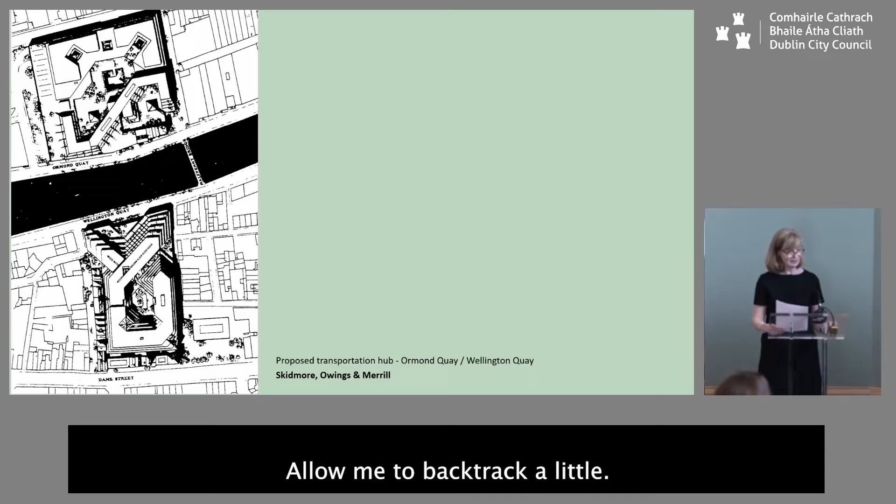In the late 1980s, Dublin Corporation had issued road widening proposals for the quays that would have involved the destruction or partial removal of several riverfront structures. These intended measures, coupled with the proposal for a quayside transport hub, triggered concern for the historic area between Dame Street and the River Liffey.

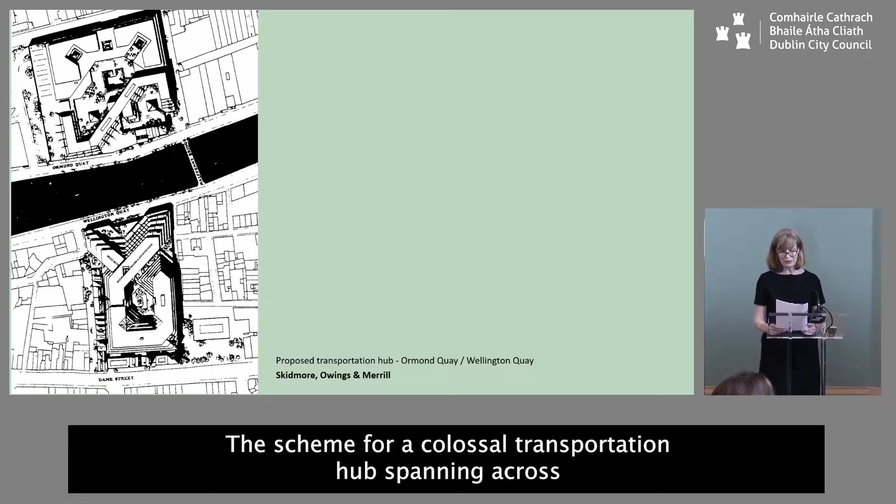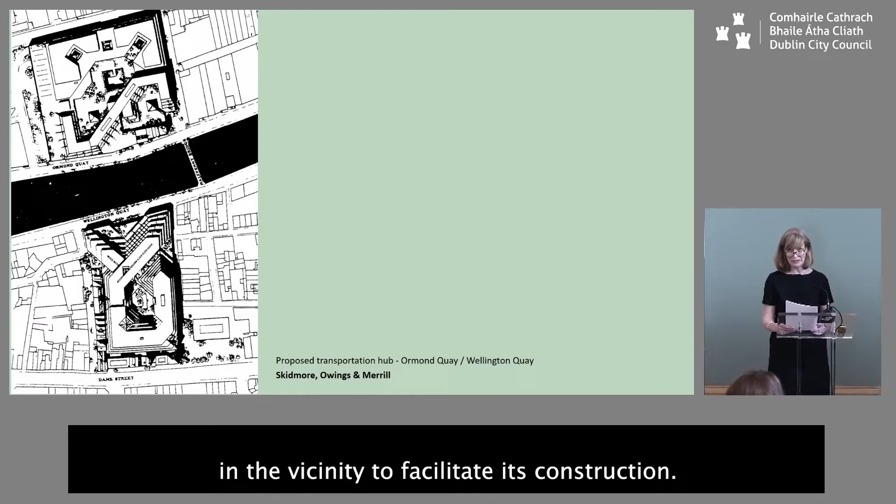The scheme for a colossal transportation hub spanning across the river was designed by American firm Skidmore, Owings and Merrill, shown here. CIE had acquired numerous properties in the vicinity to facilitate its construction. Short leases were issued and cheap rents were available in the area, as many properties were earmarked for demolition in preparation for this development.

In an article in the Architectural Review at the time, Catherine Slessor describes the temporary impact: this nurtured an eclectic, vibrant mixture of small-scale users, cafes, art galleries, shops, clothing factories, and recording studios, attracted by the cheap rents and bound together by a spirit of optimistic bohemianism.

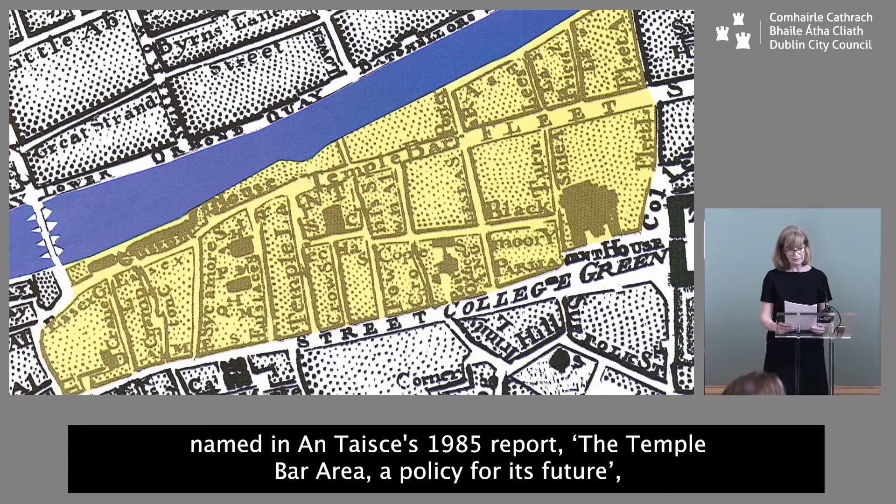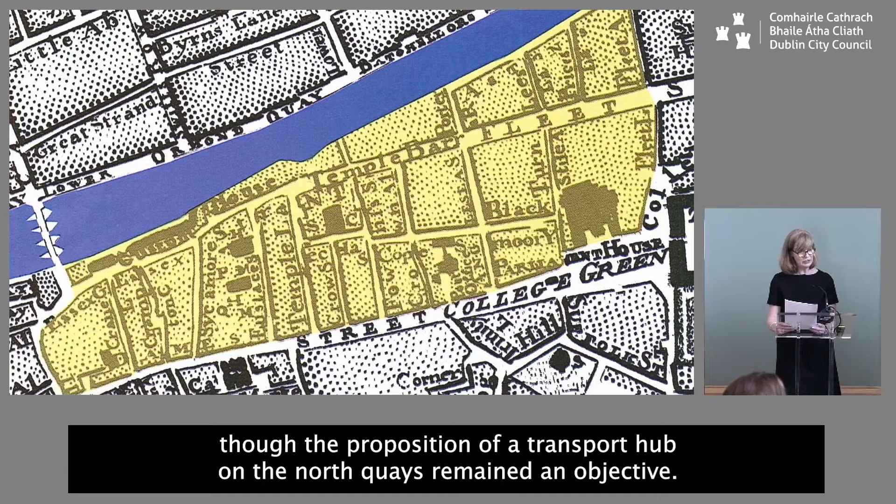Needless to say, this heavy-handed proposal prompted widespread protest and sparked debate on the treatment of the city. The plight of Temple Bar, first named in An Taisce's 1985 report, The Temple Bar Area: A Policy for Its Future, attracted political consideration, having gained press attention. The plans for the bus depot on the south side of the quays were eventually shelved in 1987, though the proposition of a transport hub on the North Quays remained an objective.

In a landmark move, a state agency, Temple Bar Properties, was established following the Temple Bar Renewal and Development Act in 1991, to manage the reinvention of this area and oversee the creation of a new cultural quarter for the city.

Consequently, a competition to develop an architectural framework plan for Temple Bar was announced. 12 practices were invited to enter, and Group 91 submitted the winning entry.

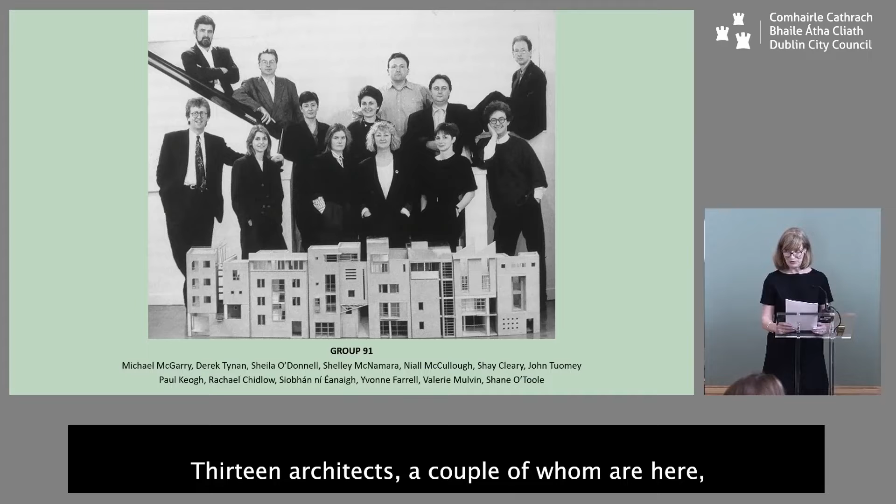13 architects, a couple of whom are here, from 8 small architectural practices made up the Group 91 consortium. The group had formed in 1991 to celebrate Dublin's designation as the European City of Culture, but many of them had collaborated on urban proposals and exhibitions in the 1980s, which could now be tested.

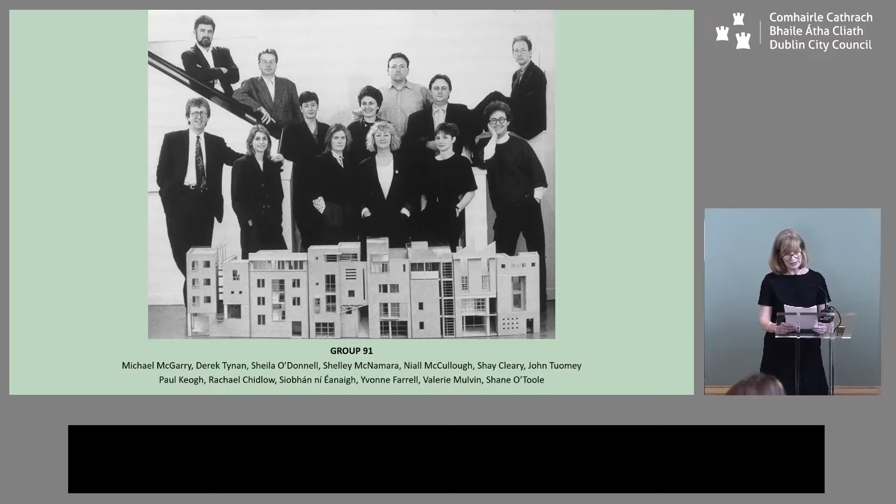In tracing formative influences, it's interesting to note that many of the Group 91 architects had studied together in UCD, some under architect Ivor Smith, who was Professor of Architecture in UCD in the 1970s. Smith and his so-called Flying Circus cohort, which included Ed Jones, Kenneth Frampton, John Miller, Chris Cross and Neave Brown, among others, would fly in from London to teach each week.

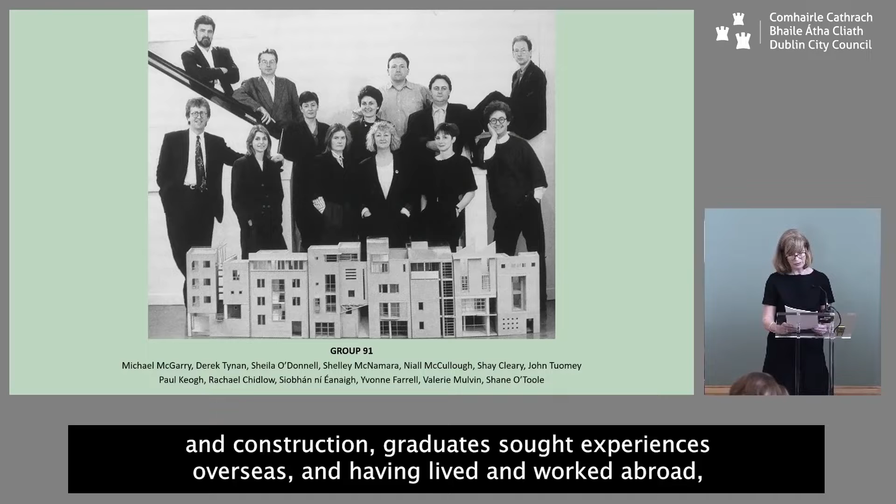The 1980s became a time of experimentation and reflection for many architectural practices in Dublin. With a lack of opportunity in building and construction, graduates sought experiences overseas, and having lived and worked abroad, a generation of young architects brought with them new ideas and attitudes to urban regeneration on their return home.

In a 1984 article, Key Questions, in the Architect's Journal, Gerry Cahill, who we've just been hearing about, describes an exhibition highlighting the work of new emerging practitioners at the time, such as the City Architecture Studio, a collaborative group of young architects, many of whom would go on to form Group 91. The projects exhibited explored the challenges and potential of building in the city and sought to demonstrate how traditional building considerations and urban patterns can be incorporated into new designs.

In 1985, many of the architects involved had participated in the UCD Dublin City Quays project, which was led by Gerry Cahill, Loughlin Kealy and Cathal O'Neill. In many senses, this celebration of what might be possible was enshrined in this endeavour.

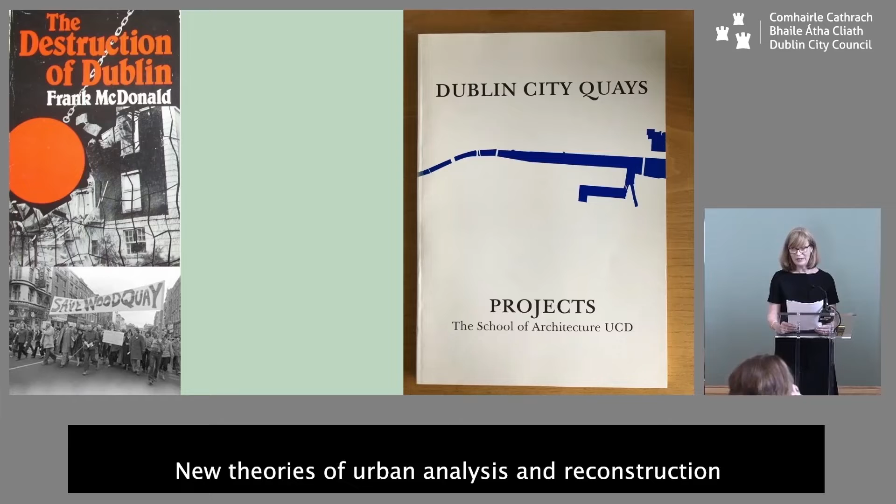The writings of international architects and theorists such as Aldo Rossi, Leon Krier, Gunnar Asplund and Kenneth Frampton proved influential at this time. New theories of urban analysis and reconstruction were explored and disseminated through teaching and practice. Part of this new thinking involved a rejection of modernist ideals and a move towards a more contextual approach to urban development. Further afield, Colin Rowe's 1978 Collage City presented a critical re-examination of urban planning theory, redefining the role of the architect in the context of contemporary urban design.

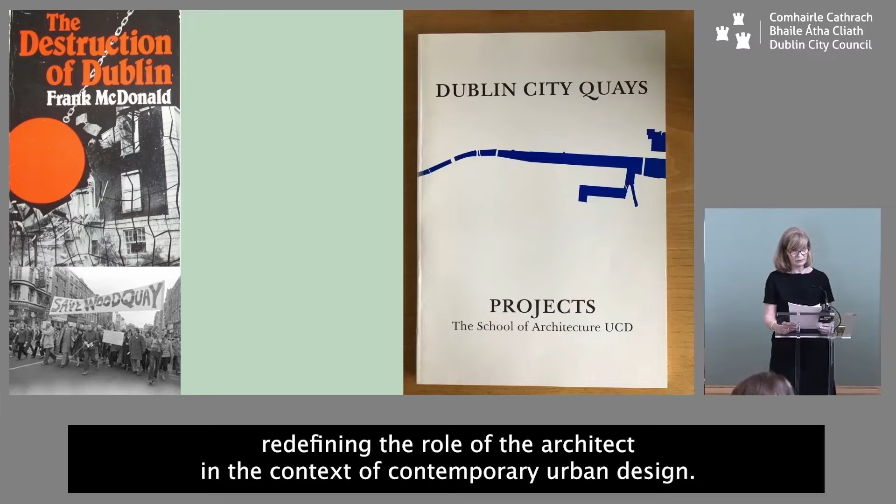Rowe was preoccupied with urban form and was critical of the modernist approach to urban development. Like Rossi, he presented a study of the traditional city and explored the layered evolution of contemporary cities against the backdrop of classical theory. In practical terms, this contextualism is reflected in the work of Group 91, who sought to introduce contemporary elements into the historic setting of Temple Bar.

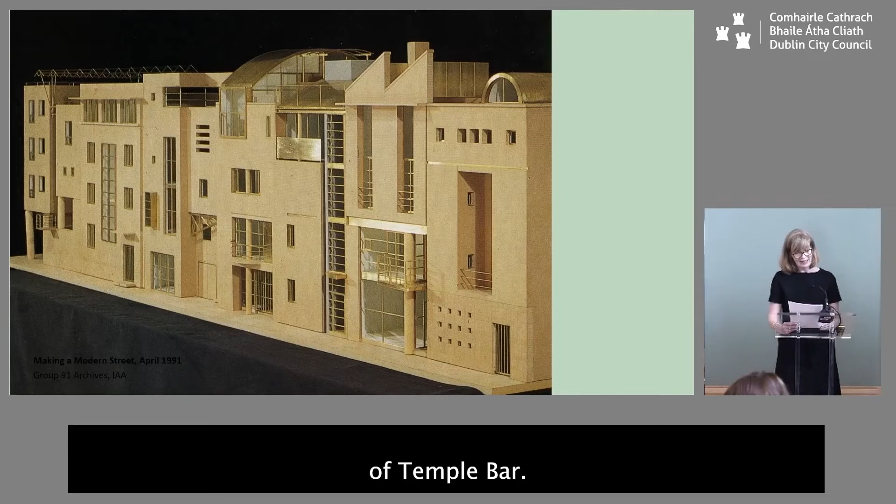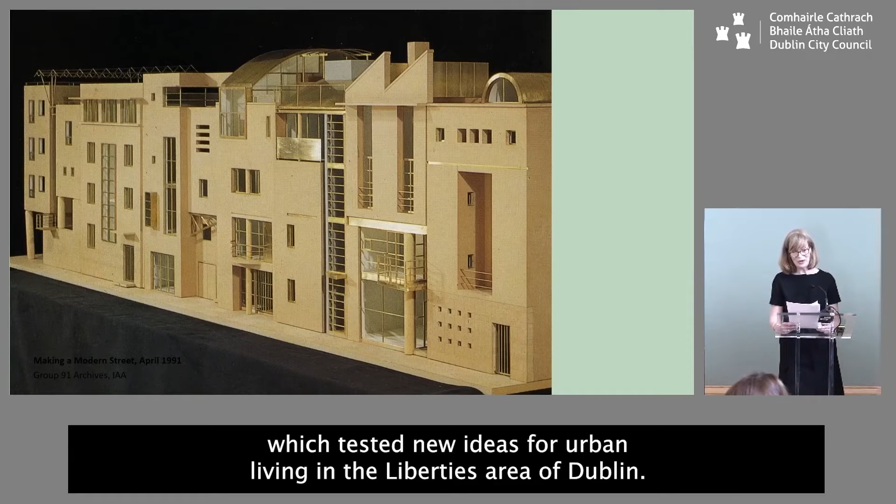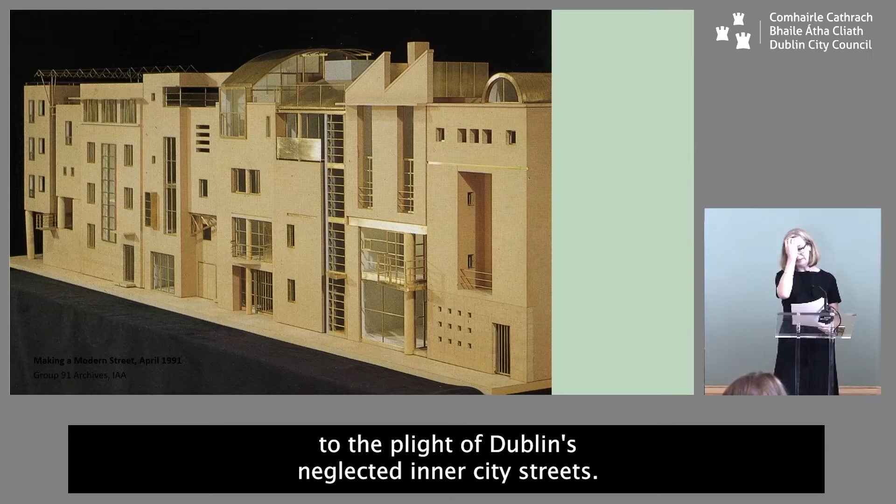In the period leading up to the Temple Bar competition in April 1991, Group 91 staged Making a Modern Street, an architectural exhibition which tested new ideas for urban living in the Liberties area of Dublin. The proposals were intended to be provocative, to ignite debate and bring focus to the plight of Dublin's neglected inner city streets. They won the Temple Bar competition in the autumn of that same year.

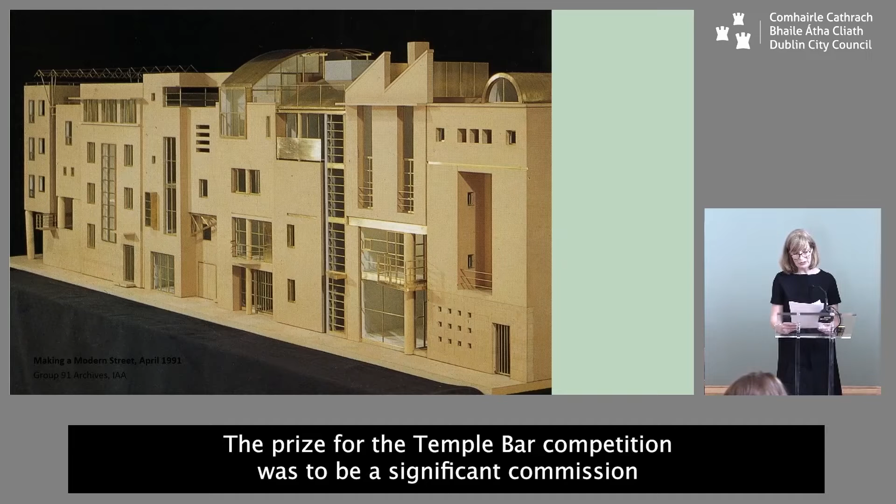Derek Tynan recounts how they were the new kids on the block, hungry for work. The prize for the Temple Bar competition was to be a significant commission involving the design of a series of public spaces.

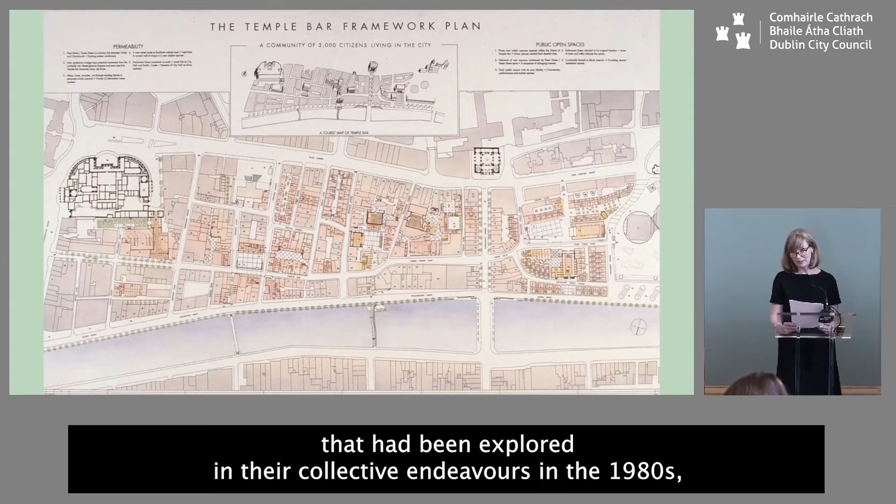The Group 91 framework plan encapsulated many of the ideologies and theories that had been explored in their collective endeavours in the 1980s, and in this regard, they were poised to tackle this challenging brief.

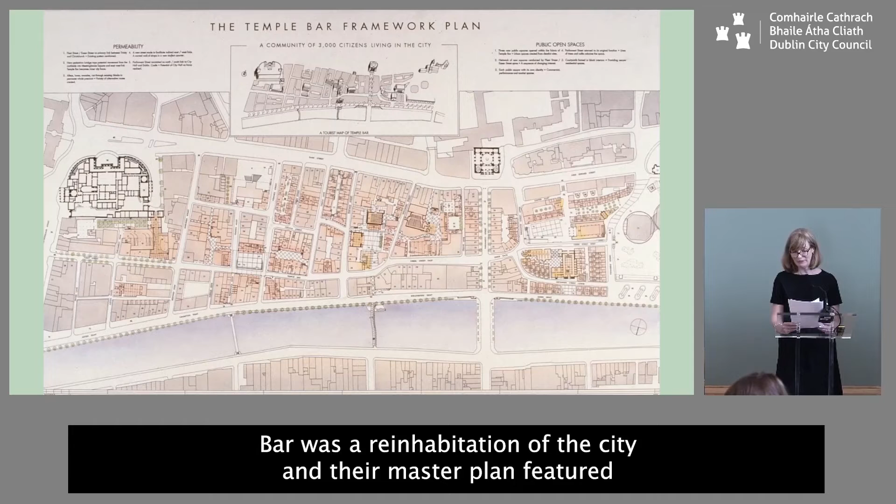Central to the Group 91 vision for Temple Bar was a re-inhabitation of the city, and their master plan featured the tagline, 'A community of 3,000 citizens living in the city.'

Their design strategy prioritised an overview of the historic quarter and a regeneration of existing structures and streets rather than a tabula rasa approach to development. Pedestrian routes and public spaces were designed to connect a series of civic spaces, or cultural clusters, dotted through Temple Bar, opening up spaces within urban blocks that were largely decrepit or derelict.

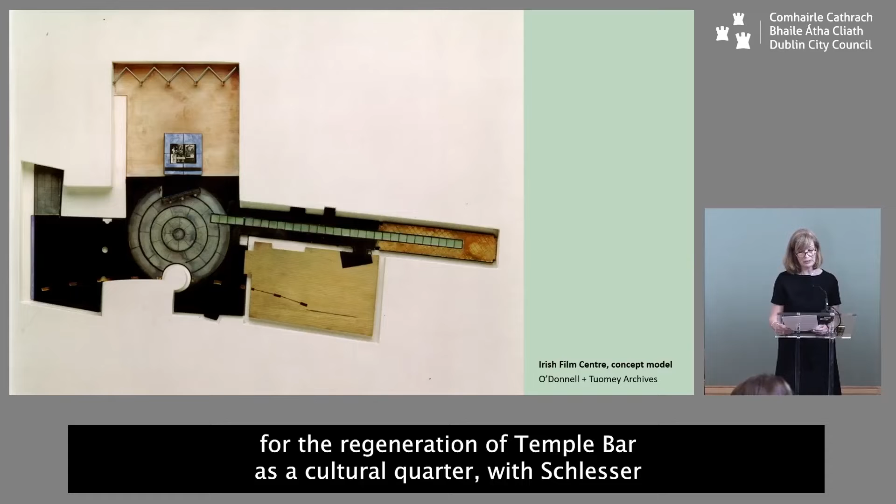In this sense, O'Donnell and Tuomey's Irish Film Centre was a pilot project for the regeneration of Temple Bar as a cultural quarter, with Slessor pronouncing it a standard bearer for the area's renaissance.

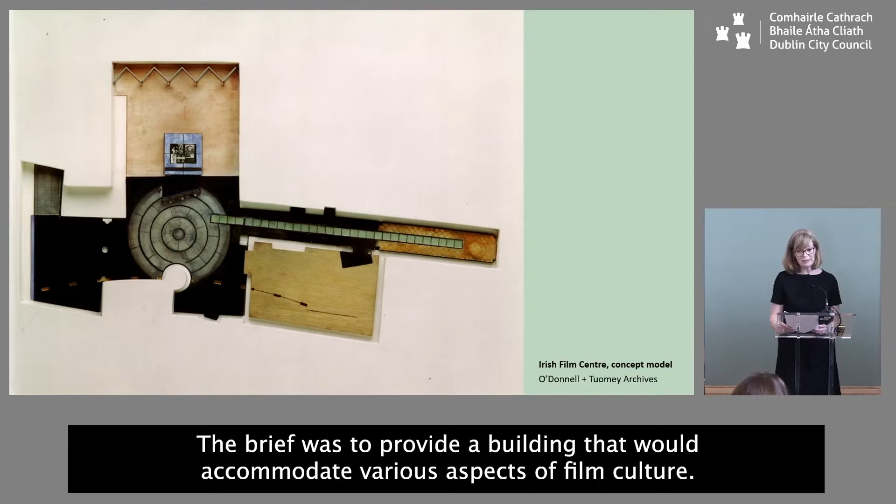Though completed in 1992, the IFC, now the IFI, had its origins in 1986, when a Centre for the National Film Institute was earmarked for Temple Bar. The brief was to provide a building that would accommodate various aspects of film culture.

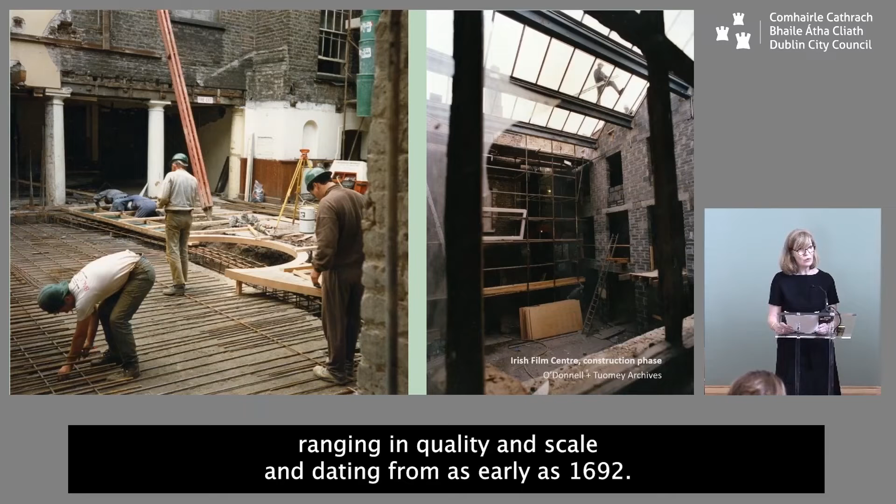The site for the film centre was that of the former Quaker Meeting House and School, a collection of 9 buildings ranging in quality and scale and dating from as early as 1692.

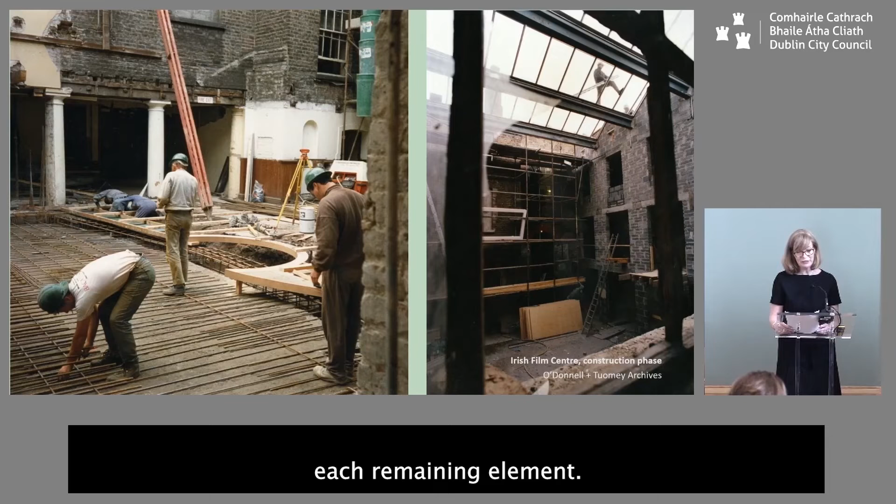Sheila O'Donnell recounts how they adopted an archaeological approach to the existing structures on the site, measuring and mapping each remaining element. The design intention was to regenerate the layers within the complex blocks, retaining as much original fabric as possible whilst introducing new elements and interventions.

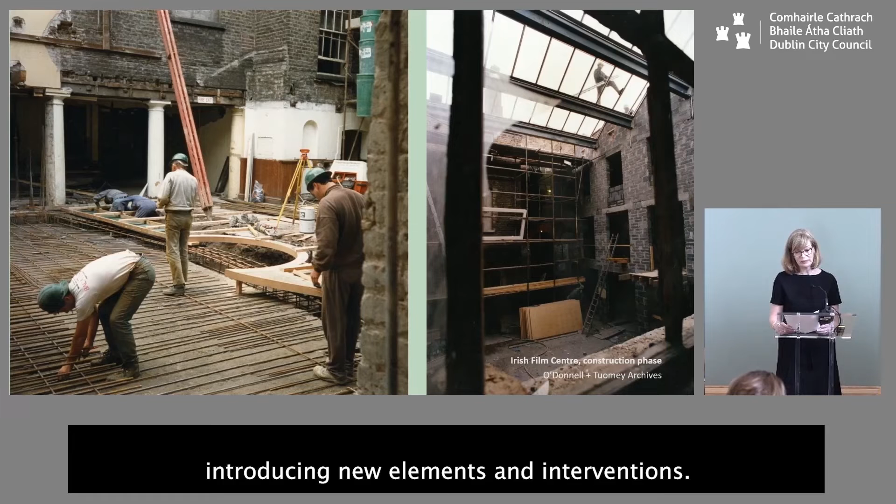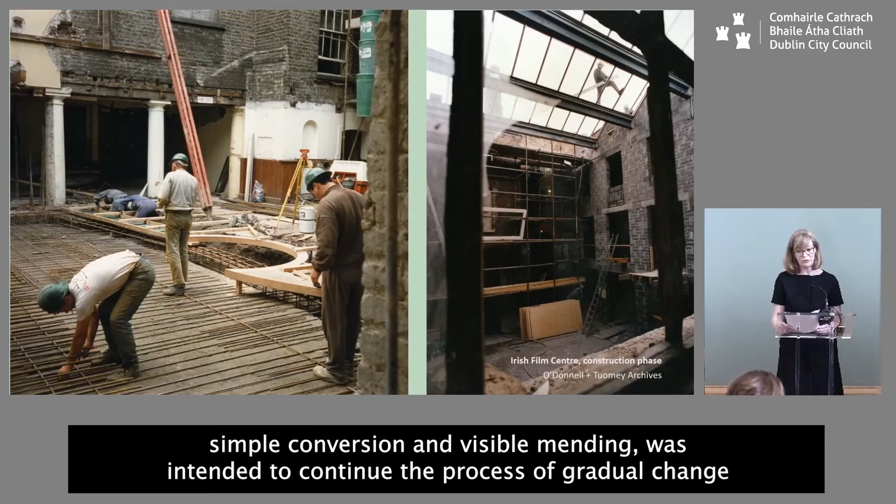To quote the architects: 'Our site-specific strategy for the new film centre, comprising new interventions, surgical demolitions, simple conversion and visible mending, was intended to continue the process of gradual change and incremental adaptation that had characterised the historical development of this site.'

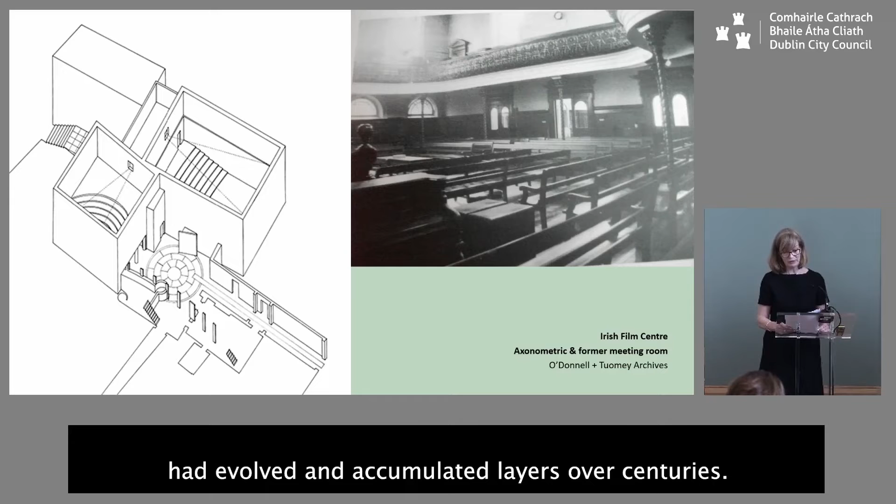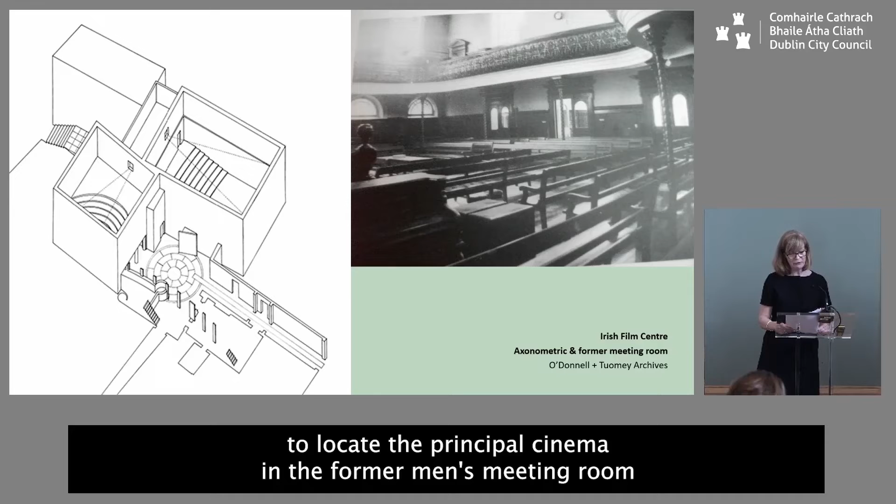The former meeting house complex had evolved and accumulated layers over centuries. The central atrium space, around which the workings of the IFI hinge, was formed on the footprint of the historic courtyard. The decision to locate the principal cinema in the former men's meeting room and the second cinema in the former women's meeting room informed the overall design strategy.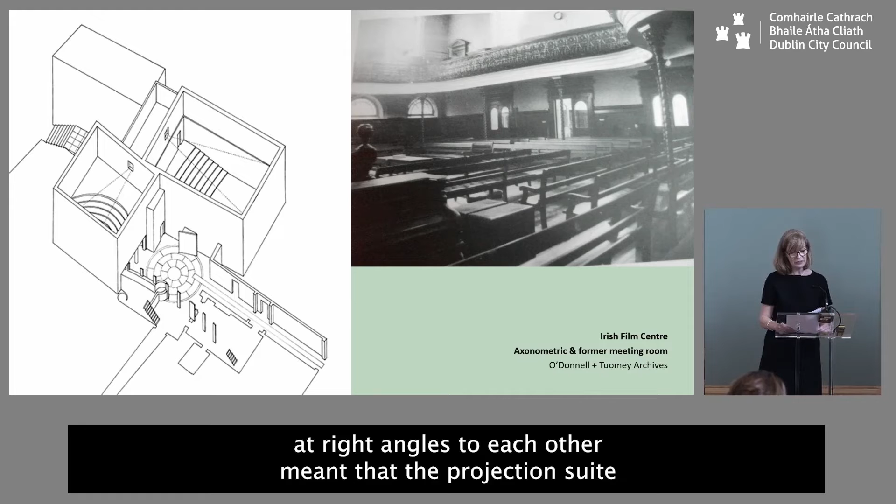The adjacent position of the screening rooms at right angles to each other meant that the projection suite could be strategically located between the two cinemas. Thus, auxiliary spaces could be organised accordingly within the remaining structures and voids.

Though some losses were inevitable, the intervention was respectful of the historic fabric and displayed an in-depth understanding of the site. The balance between existing and new is carefully judged, allowing modern insertions to reanimate existing fabric.

The palette of materials, stone, steel, brick, plaster, was chosen to reflect the modest character of the surrounding Temple Bar streets and warehouse buildings. One of the design intentions was to extend the public realm of the city into the centre of the urban block.

John Tuomey recounts his delight on seeing a no bicycle sign posted on the wall of the foyer in the early days.

The cinemas, by contrast, are comfortable lined spaces with the intimacy of a private room. Historic elements within the existing structure were retained, with window openings, cornices, and door surrounds emphasising the domestic scale.

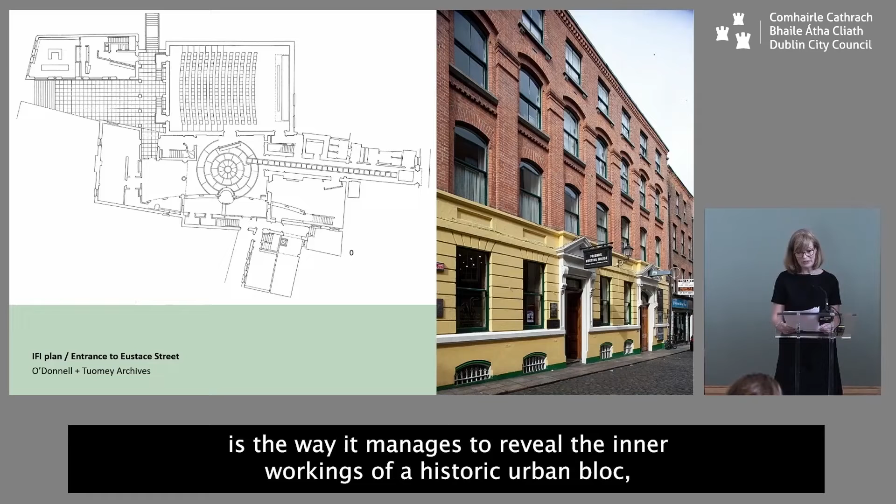Part of the intrigue of this project is the way it manages to reveal the inner workings of a historic urban block, effectively turning it inside out and creating a lively urban space within.

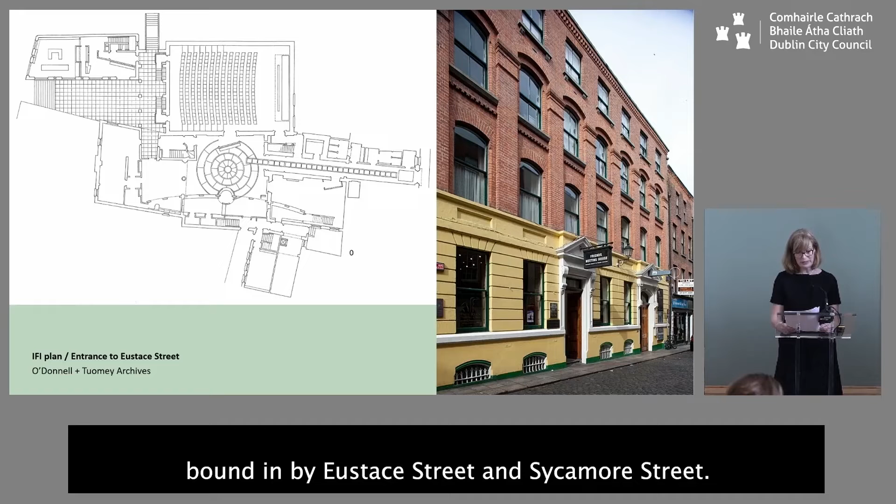The film centre is embedded within the block, bound in by Eustace Street and Sycamore Street. O'Donnell and Tuomey's intervention has no conspicuous street presence and is accessed by a series of narrow laneways which lead the visitor to the central atrium.

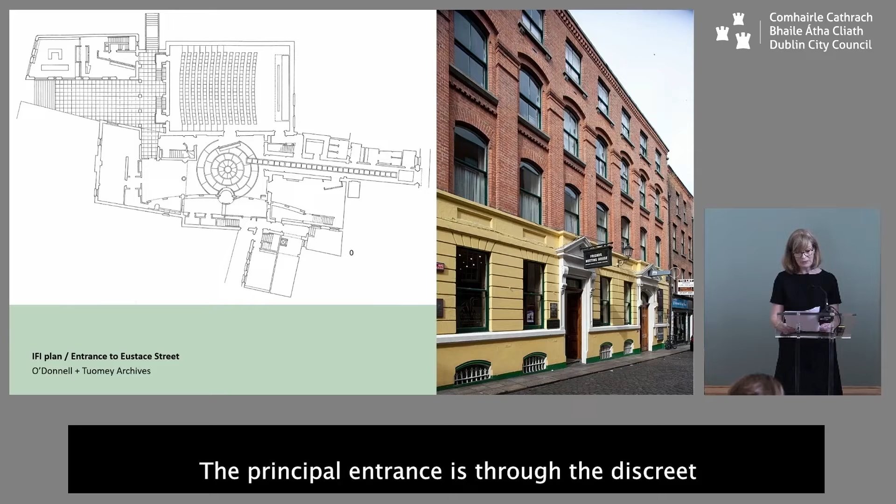The principal entrance is through the discreet pedimented doorway of number 6 Eustace Street. An illuminated film strip of etched glass set into the floor lines the dimly lit vaulted passageway and extends into the bright atrium space.

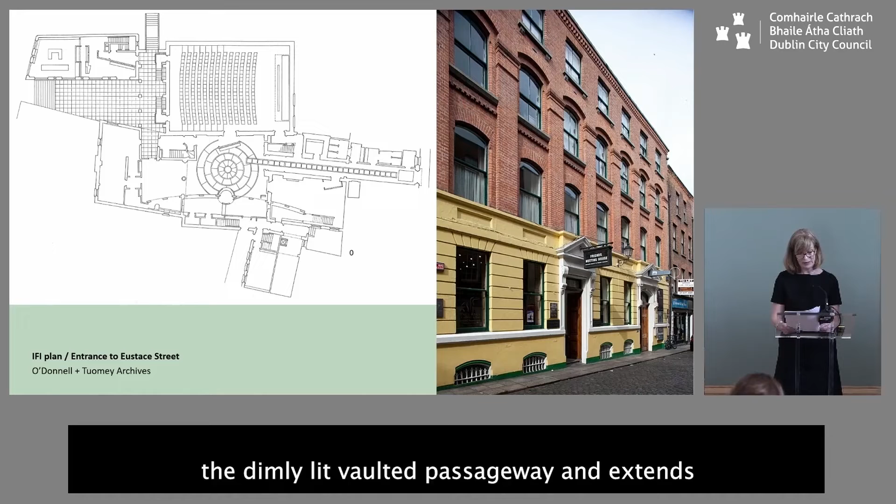The centre is also accessed from Meeting House Square and Sycamore Street via a raised courtyard concealing an archive store and workshop below, and previously from Dame Street through Cogle's Court.

The inner atrium brings to mind Florian Beigel's Half Moon Theatre in London. The space is clearly theatrical. In a critique in The Irish Architect in 1992, Sean O'Leary notes the Cinecittà parallels, the rare and magical blend of film and cityscape found within the walls of the centre. He describes how the project magically balances substance with veneer, providing Dublin with a place where citizens' repressed desire for promenading can be relieved to a limited extent.

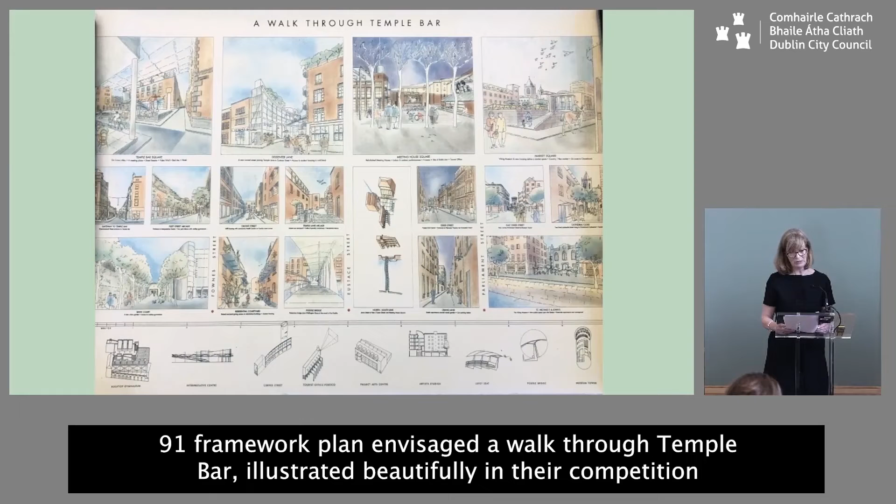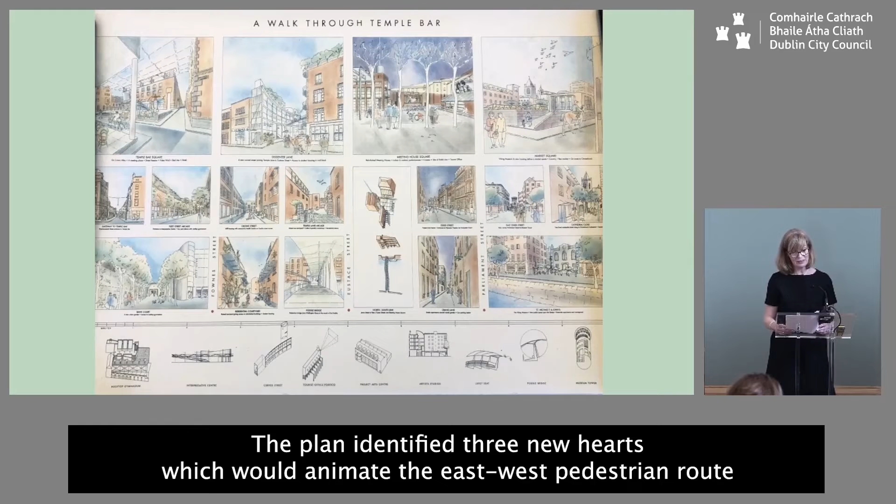The Group 91 Framework Plan envisaged a walk through Temple Bar, illustrated beautifully in their competition entry as a series of meandering routes within the historic infrastructure. The plan identified three new hearts which would animate the east-west pedestrian route through Temple Bar: Temple Bar Square, Meeting House Square, and Market Square.

Meeting House Square is named after the Presbyterian Meeting House on Eustace Street, which dates from 1728, and the former Quaker Meeting House. Designed by Paul Keogh Architects and completed in 1995, Meeting House Square was intended to serve as an outdoor room, an open-air performance area.

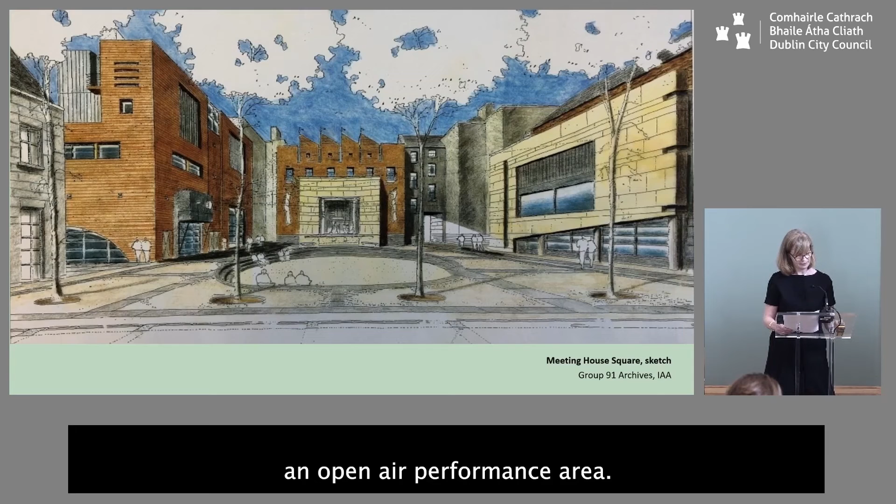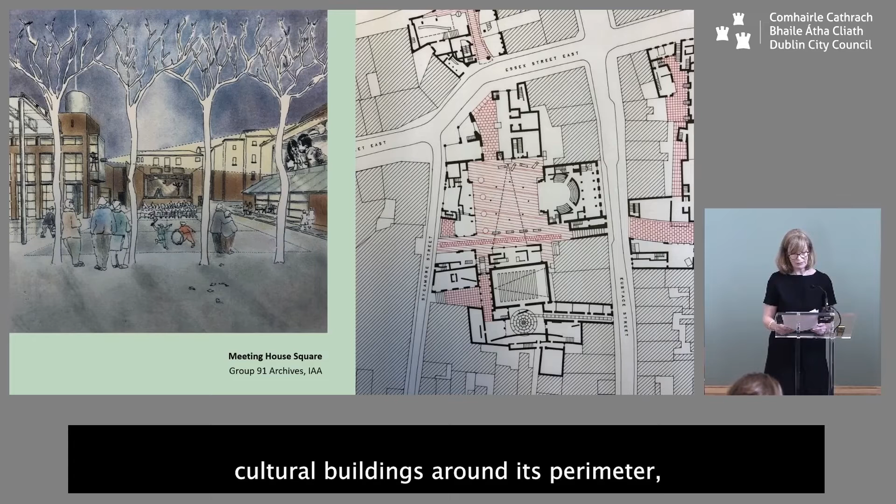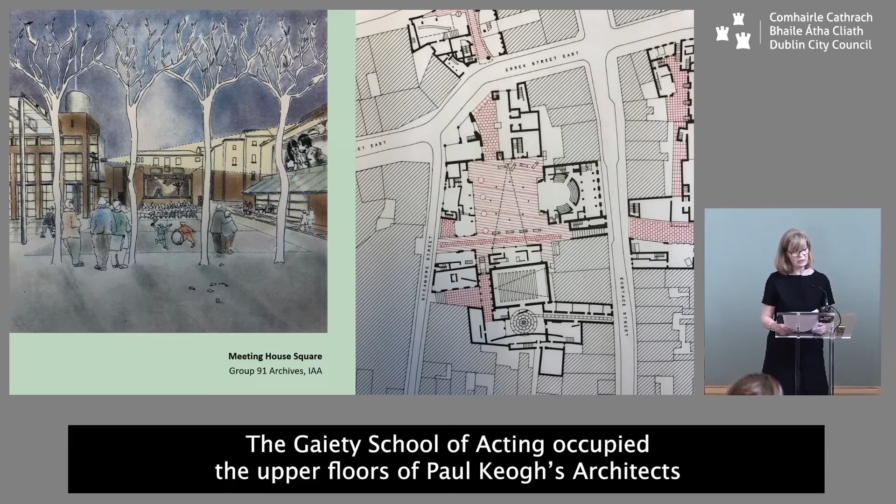Formerly a surface car park, it was strategically located on various axes through Temple Bar. Conceived as a cultural hub, the square is formed by cultural buildings around its perimeter, namely Shane O'Toole and Michael Kelly's Ark Cultural Centre for Children in the former Meeting House, alongside O'Donnell and Tuomey's Gallery of Photography and National Photographic Archive and their Irish Film Centre and Archive. The Gaiety School of Acting occupied the upper floors of Paul Keogh Architects' mixed-use buildings, with Eden Restaurant by Tom de Paor occupying the ground floor.

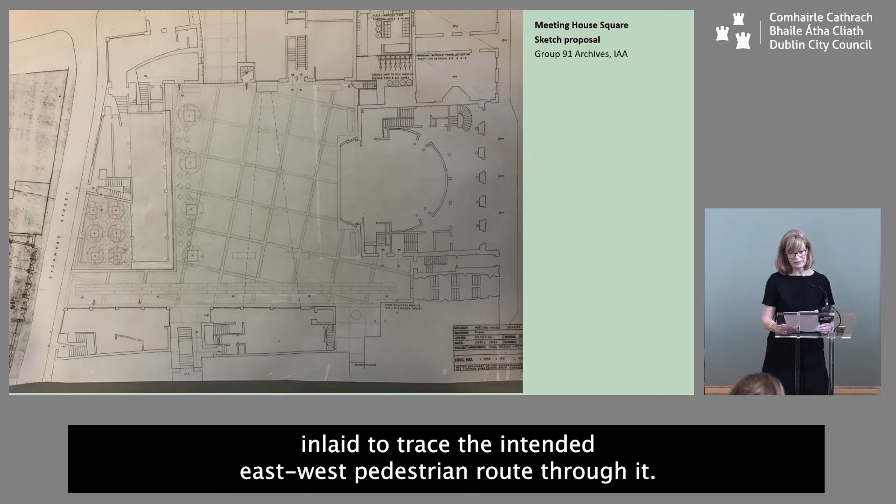Meeting House Square, measuring 750 metres squared, was laid out in Wicklow granite, with sections of limestone inlaid to trace the intended east-west pedestrian route through it. Four trees punctuated the west edge of the square, providing screening for the seating area outside the restaurant.

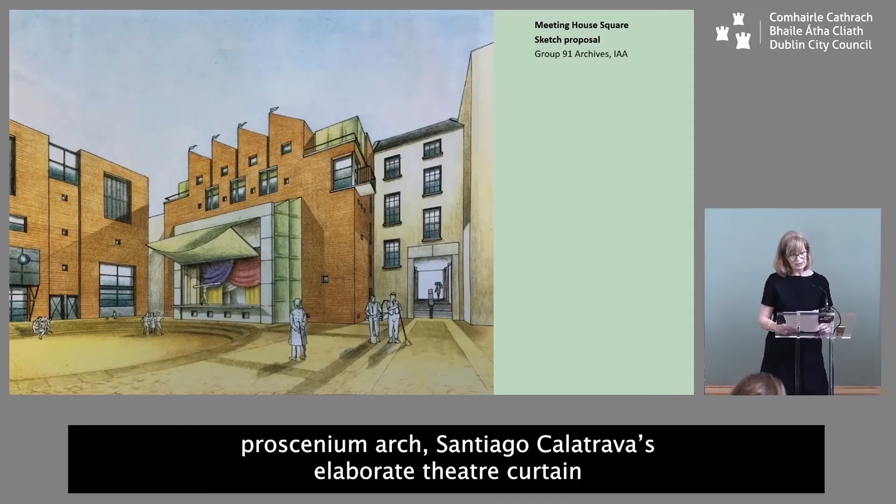Encased in a copper-clad proscenium arch, Santiago Calatrava's elaborate theatre curtain forms a centrepiece within the red brick facade of the Ark.

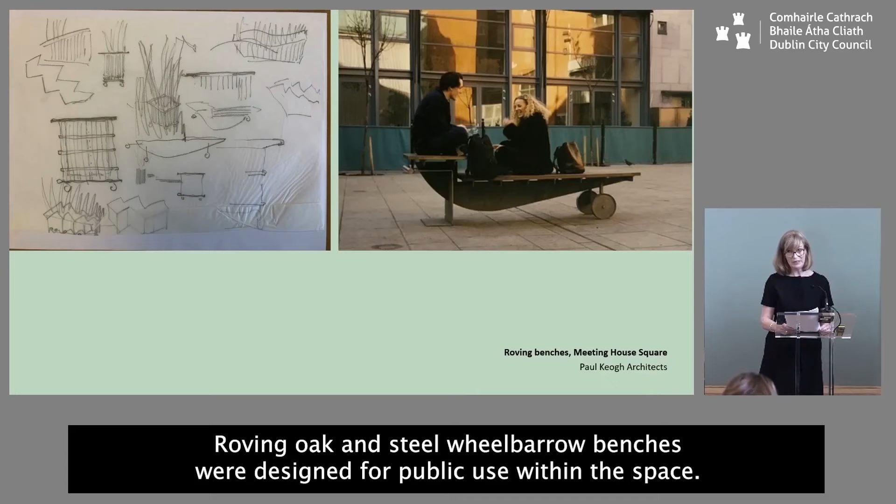Roving oak and steel wheelbarrow benches were designed for public use within the space. With seating on two levels, the benches were fitted with cast iron wheels to allow them to be moved around the square as required.

Contemporary urban developments in Europe were a source of inspiration for Group 91 in the design of their framework plan. Paul Keogh recalls trips as a studio tutor in the UCD School of Architecture, in particular a visit to Barcelona, where the contemporary urban interventions and elegant public spaces made a distinct impression. He cites Bach and Mora's Plaças de Gracia as a particular influence, most notably their Plaça del Sol from 1985.

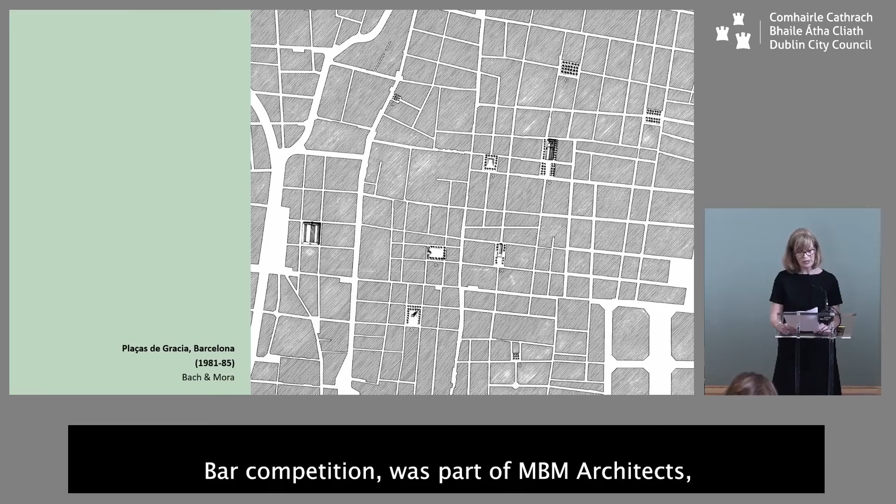As it happened, David Mackay, one of the assessors of the 1991 Temple Bar competition, was part of MBM architects, who were responsible for several urban projects in Barcelona, most notably the design of the Olympic Village and Port for the 1992 Olympics.

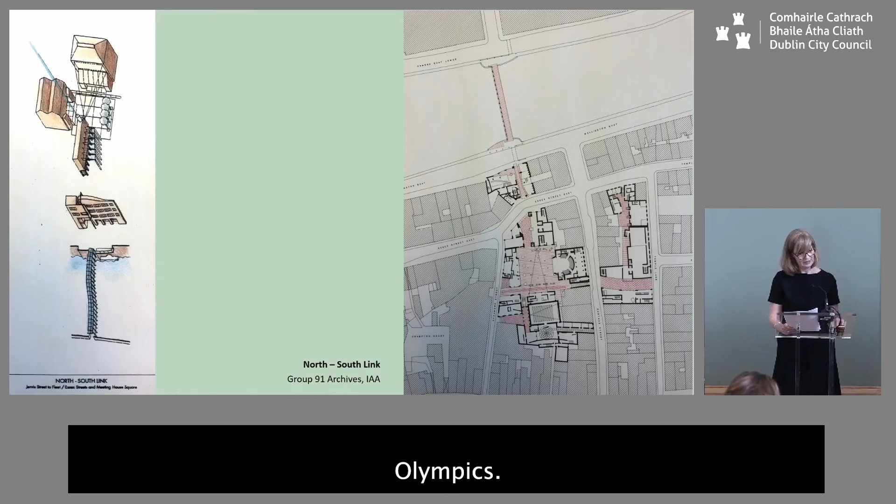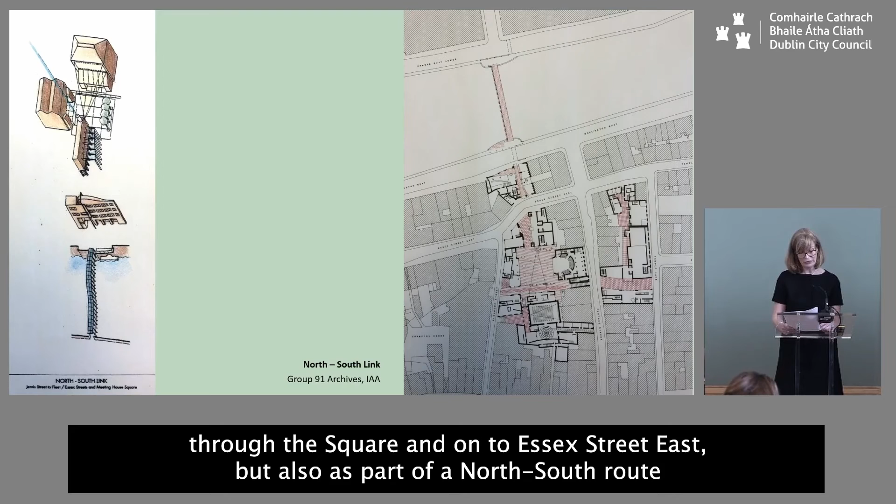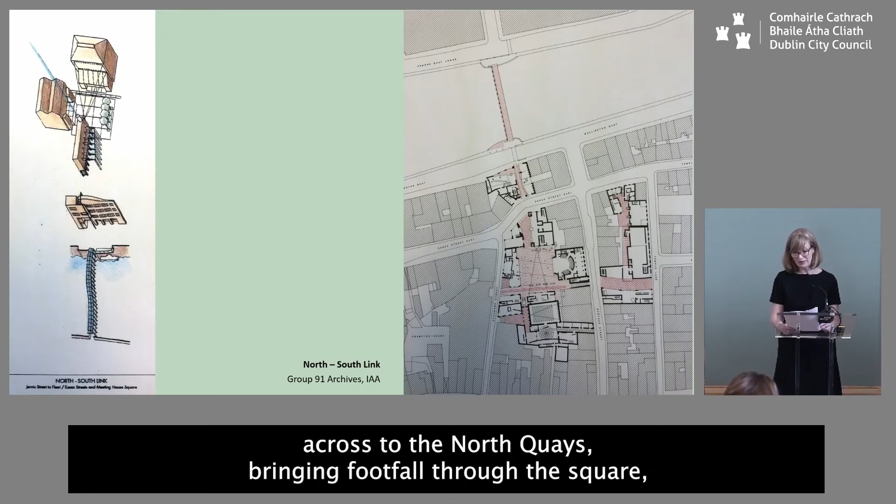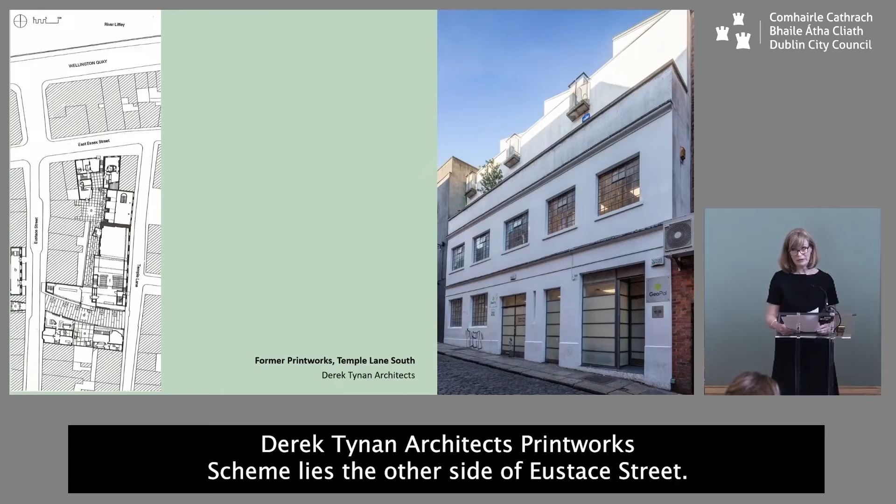Embedded within an adjacent urban block, Derek Tynan Architects' Printworks scheme lies the other side of Eustace Street. The site for the development was that of the former two-storey Curtis Printworks on Temple Lane South, which dates from 1935 and was reclaimed as part of the scheme.

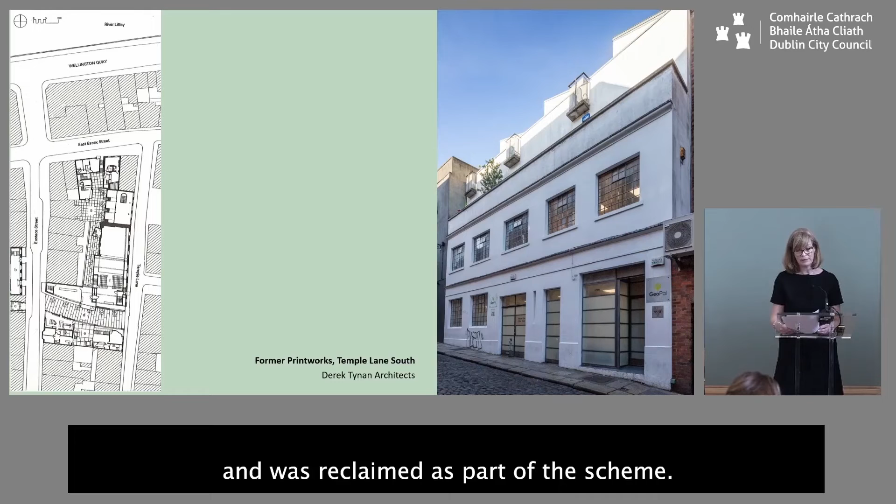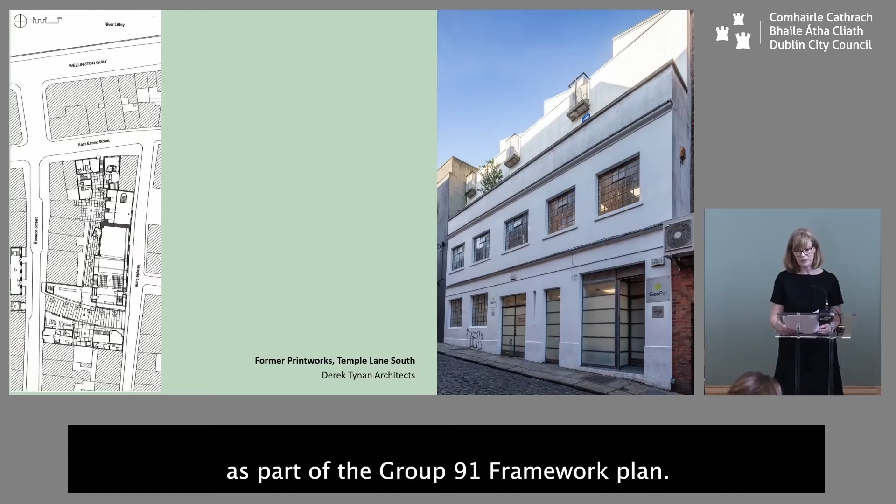The historic block within which the Printworks is located originally stretched south to Dame Street. However, in 1995, Curved Street was constructed through the block as part of the Group 91 framework plan. A ramped street designed to connect Curved Street to the Printworks through the block also formed part of the strategy, but remained an enclosed route within McCullough Mulvin's Music Centre.

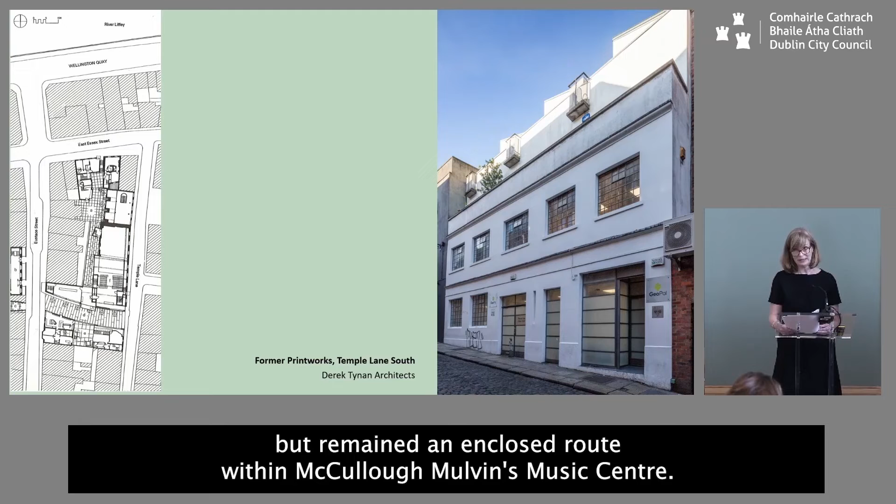As in the case of the IFI, the Printworks development, a collection of 10 apartments, presents an understated exterior. Though the historic structures are only partially retained, the re-inhabitation of these elements established a scale and rhythm that belongs within its setting.

The use of existing structures to Temple Lane and Essex Street East allows the Printworks to disappear within its context. Commercial units form a podium, creating a presence at street level, while the residential accommodation occupies a private world above.

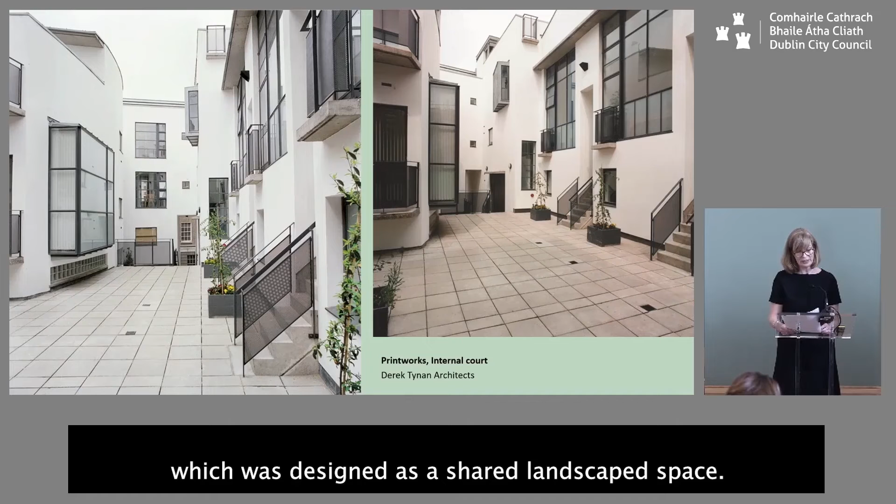A double-height slot signals the entrance to the complex, giving way to a narrow staircase leading to a raised internal court. All the apartments are accessed from this datum, which was designed as a shared landscaped space.

In addition to the hollowing out of the interior to form a central court, a series of private open spaces serve the apartments. This connection to external space is an essential feature of the development, eroding the density of the block.

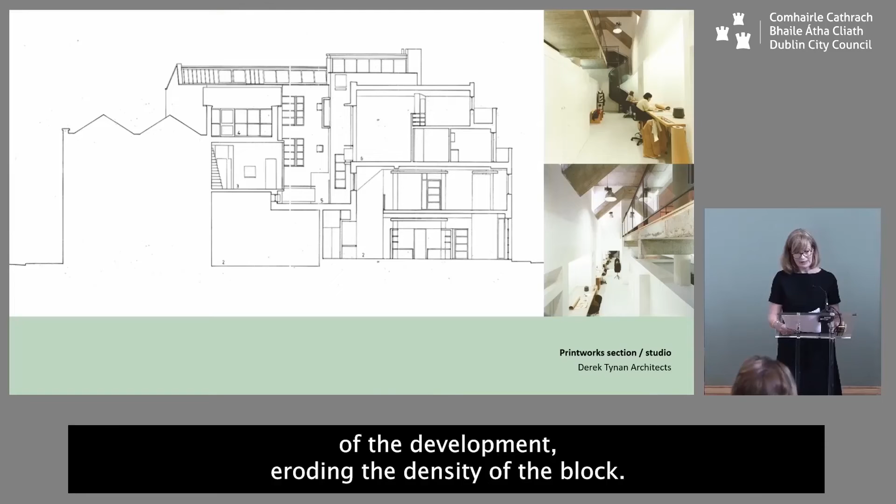The stepping of volumes allows light to enter the rear of the Temple Lane studio, while the stepped facades internally and externally maximize light to the internal spaces.

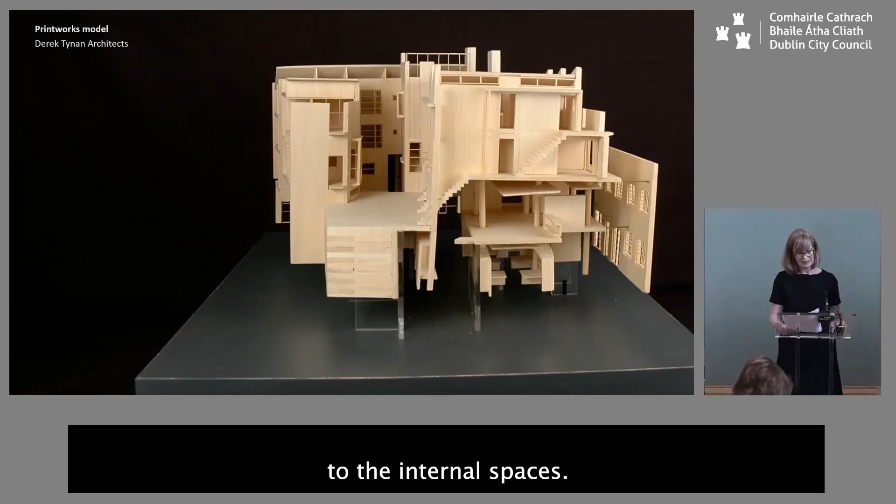The sectional device allows the upper levels of the block to benefit from light and privacy, while creating a shared intimacy internally, which is far removed from the streets of Temple Bar below.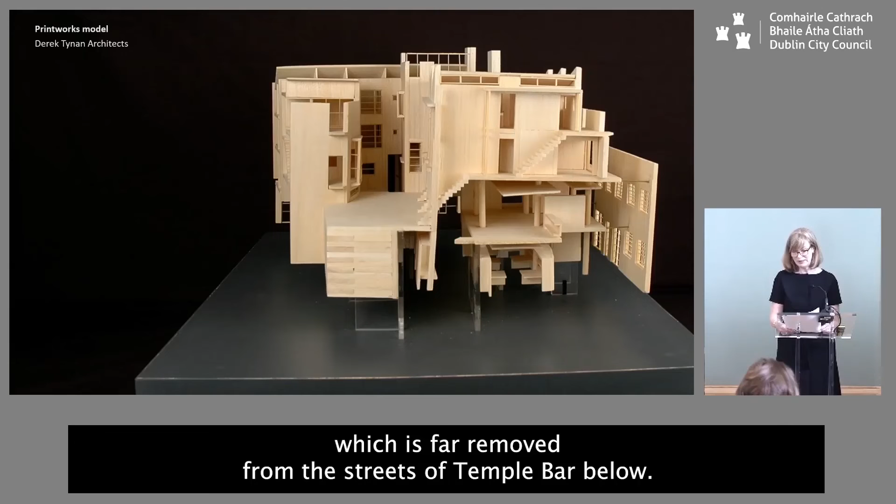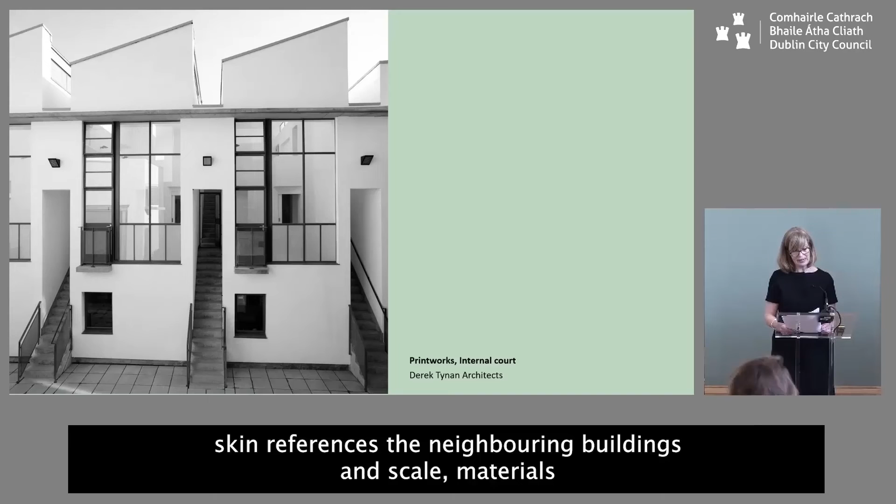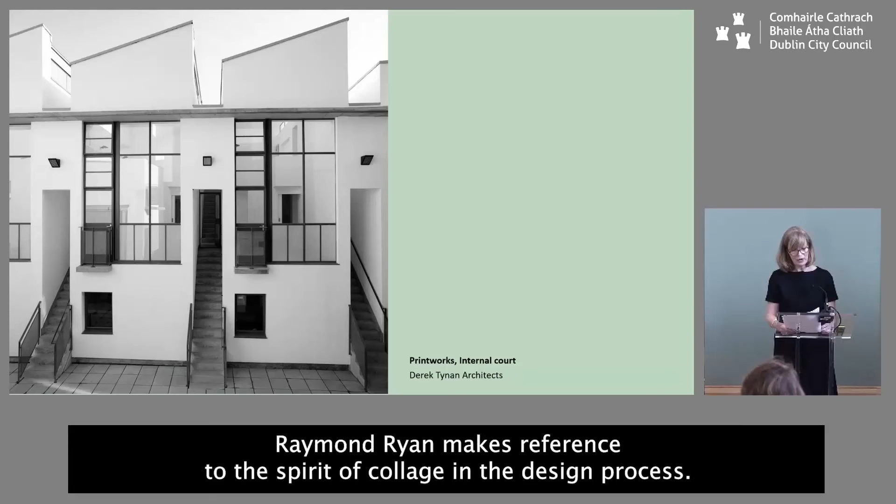The selection of materials reinforces this separation between the inner world and the street. Along the principal elevation to Essex Street East, a red brick skin references the neighbouring buildings in scale, materials, and fenestration pattern, while in the upper court, the aesthetic shifts, borrowing an industrial language and a material palette from the former Printworks.

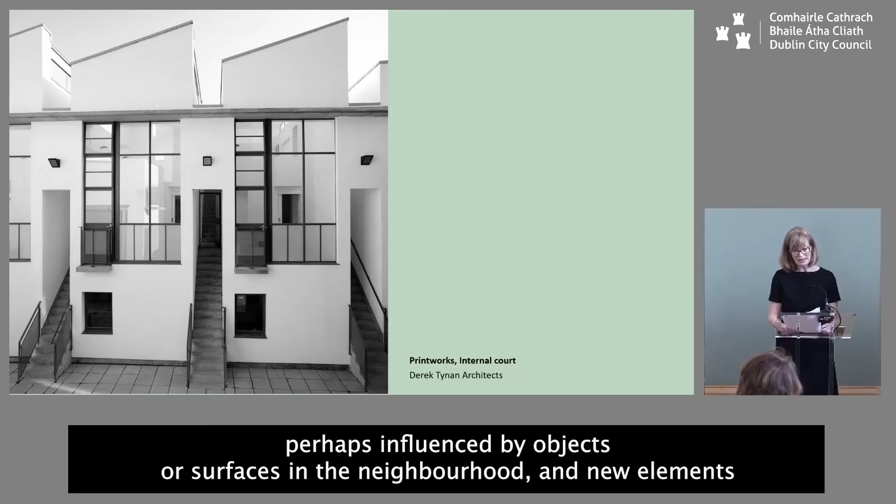Raymond Ryan makes reference to the spirit of collage in the design process. The Printworks takes elements that already existed on the site, elements perhaps influenced by objects or surfaces in the neighbourhood, and new elements derived from the architect's own history, concerns, and analyses. That is all in the spirit of collage, or in 3 dimensions, of assemblage.

So to conclude, this paper highlights just 3 case studies within a much larger body of work in the Temple Bar area.

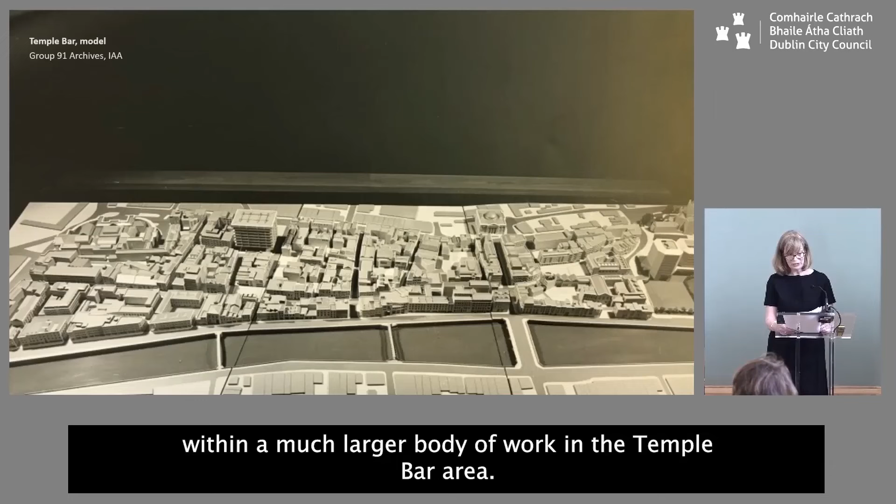Nearby Meeting House Square, the industrial elegance of McCullough Mulvin's Black Church print studio and Temple Bar Gallery and Studios enlivened the historic street of Temple Bar.

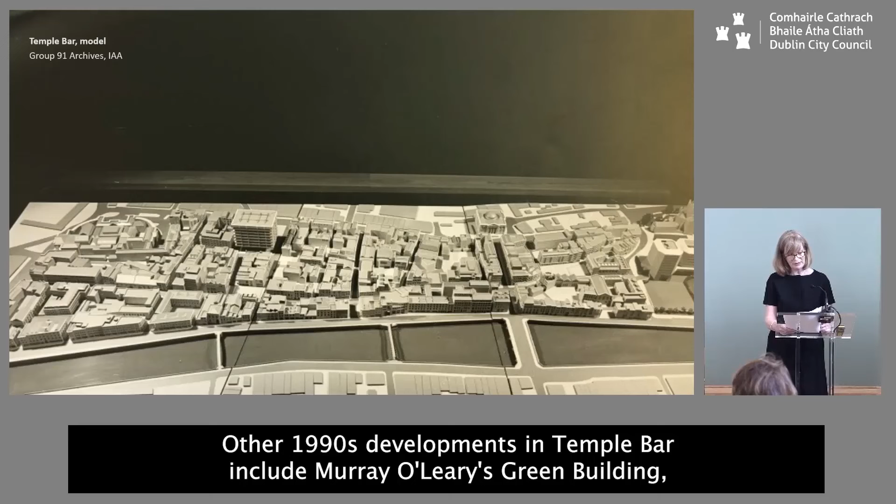And though McGarry Ní Éanaigh architects' Pottle Bridge never materialised, their Liffey boardwalk brought footfall to the North Quayside as the decade closed. Other 1990s developments in Temple Bar include Murray O'Laoire's Green Building, an early testbed for sustainable design in the city, Grafton Architects' Temple Bar Square, and Arthur Gibney's restoration of the early 18th century house at 25 Eustace Street.

Looking back on this phase of Dublin's history, what's particularly evident is the changing role of the architect in urban matters. Recalling the writings that were so influential at the time, architects turned to historic precedent for reference, examining and respecting existing urban patterns and forms.

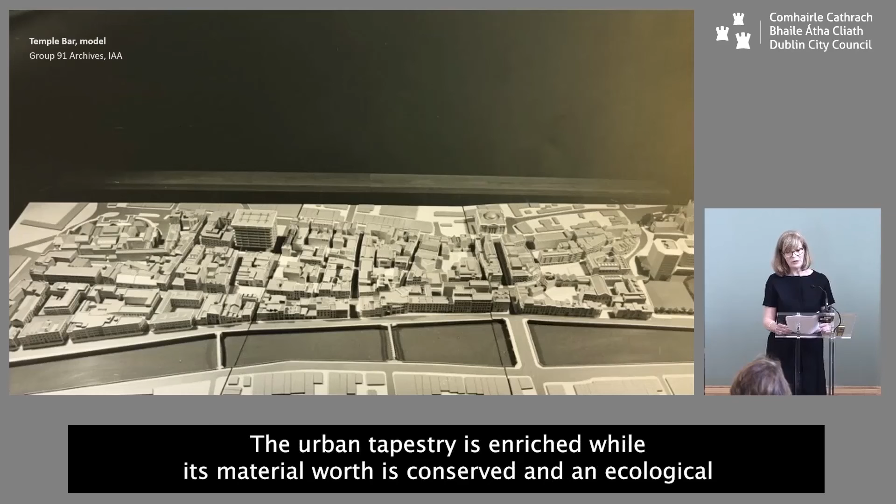To quote John Olley: 'In Temple Bar, the fabric of the city is being recycled, whether in its standing form or by the reuse of its materials. The interventions of Group 91 are stitching new uses and activities into the spaces and buildings of the existing fabric. The urban tapestry is enriched, while its material worth is conserved, and an ecological alternative is formulated to suburban expansion and the process of destruction and rebuilding.'

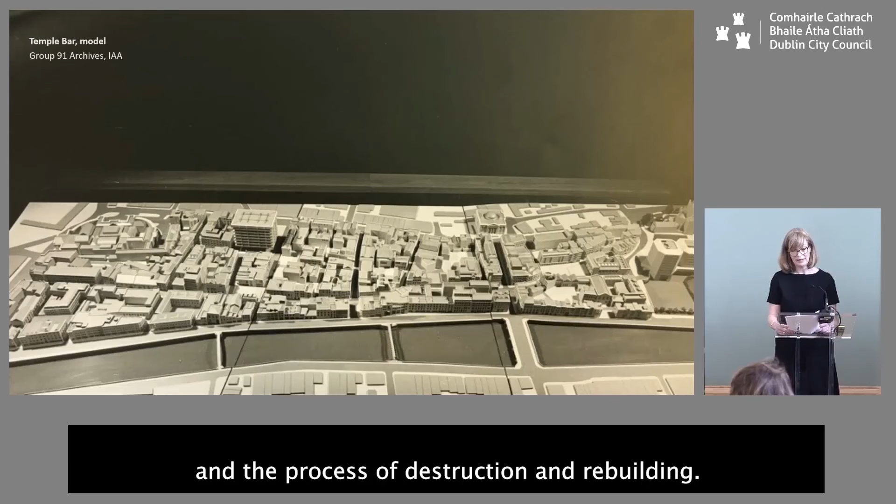Engagement with existing structures requires a very particular form of creativity. And as we reflect on architectural practice and its role and responsibilities in the context of the climate and biodiversity crises, we have no choice but to engage with our existing building stock.

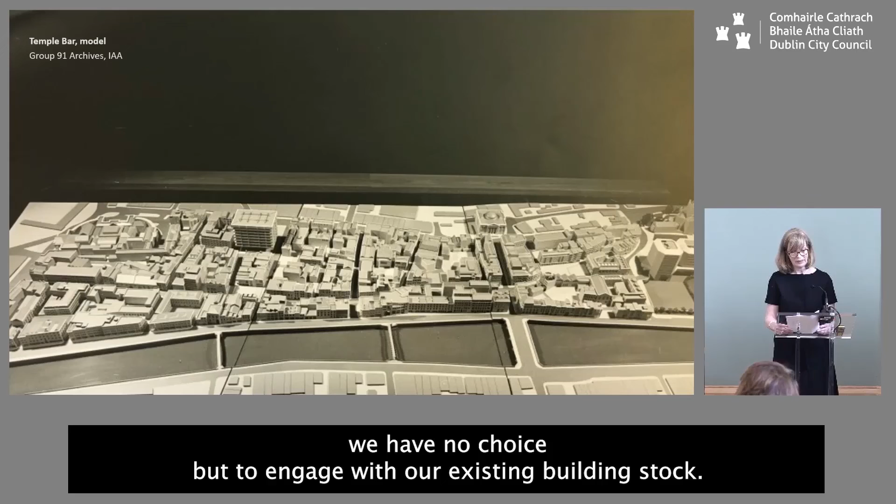The complexities of the challenges we face today demand that we focus our attentions on urban regeneration and adaptive reuse. As part of my current PhD research, I'm exploring the 2011 UNESCO Historic Urban Landscape Recommendation as a teaching framework.

This approach encourages the examination of historic landscapes as opposed to individual sites, viewed collectively with the layers of the social, environmental, and economic significance they represent. This systems approach is certainly evident in the Group 91 framework strategy.

Naturally, the reality of implementing such a visionary framework plan has its challenges. The proliferation of so-called superpubs has stifled the reputation of Temple Bar as a cultural quarter. However, there is a lot to be learned from the approach.

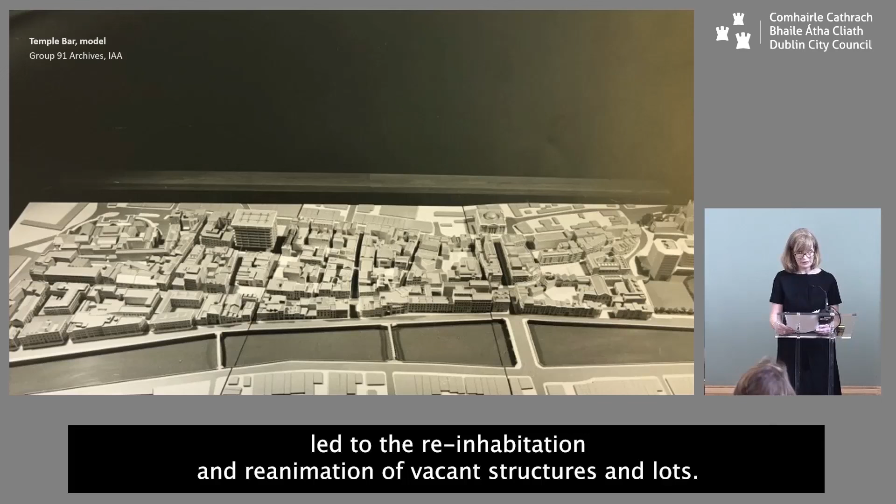Dublin City was in a state of crisis in the 1980s, and the focus of the architect began to shift in response to widespread vacancy and dereliction throughout its centre. An emphasis on urban analysis and regeneration, combined with a lofty aspiration to embrace what might be possible rather than what is probable, led to the re-inhabitation and reanimation of vacant structures and lots.

Historic sites, by their very nature, are resilient, ever evolving and adapting. Constant reinterpretation and continuity of use are key.

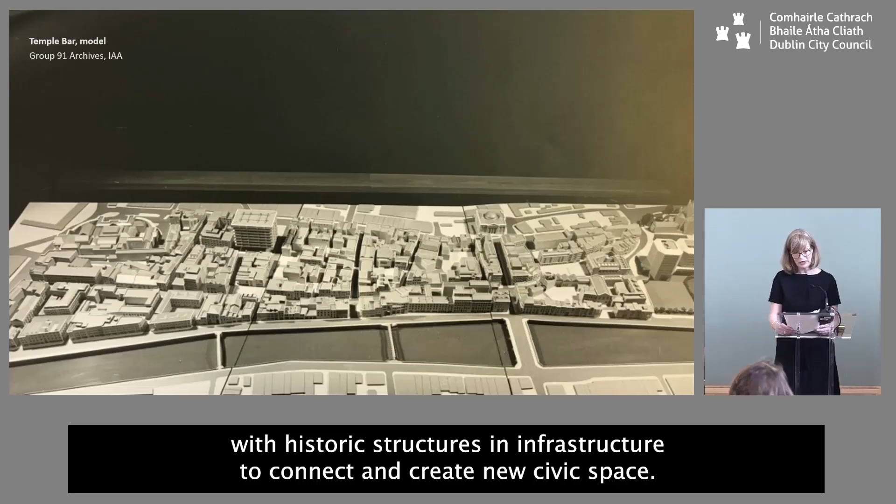Embracing a landscape approach, the framework plan was about working with historic structures and infrastructure to connect and create new civic space. Design intentions were underpinned by a practice of survey and observation, with less focus on object and more on reconfiguration of urban patterns and structures.

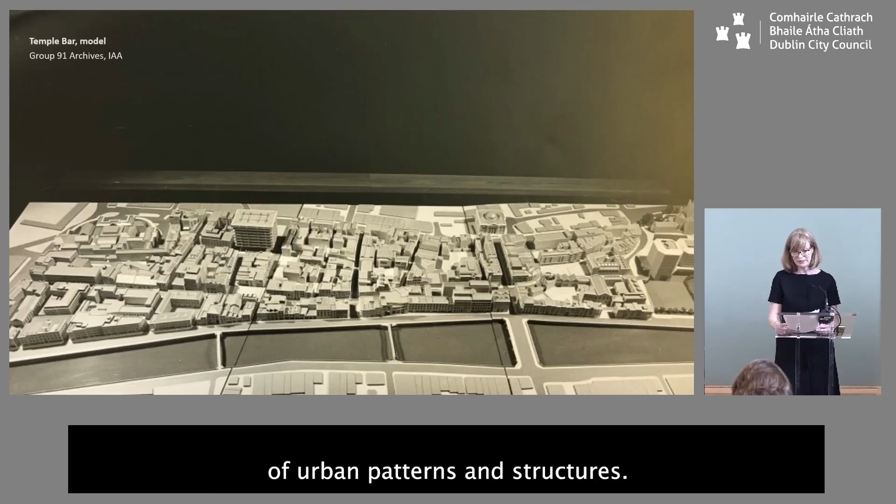Ultimately, it was about bringing life to the city and celebrating culture. And in the words of Aldo Rossi, one cannot make architecture without studying the condition of life in the city. Thank you.